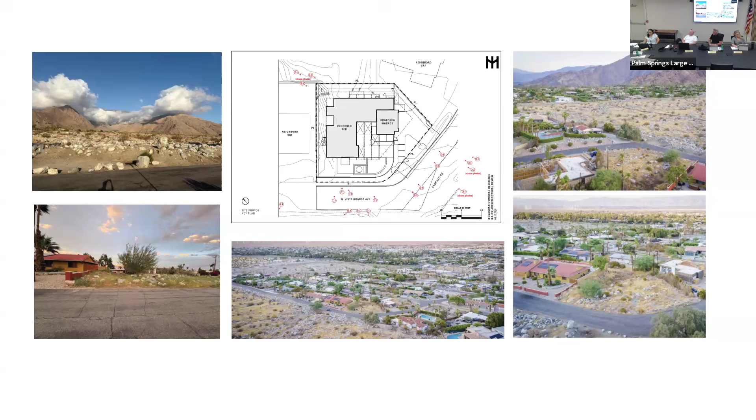The project site is a vacant lot located at the intersection of Vista Grande Avenue and Cabrillo in the Little Tuscany neighborhood. This project site is adjacent to existing developments on all sides except the south, which is the San Jacinto Mountains. Here are some photographs to show the surrounding environment of this project site. The site is adjacent to existing developments on all sides except the south, and the south side is San Jacinto Mountain open area.

The city's zoning code defines hillside property as any area that's 10% or more in slope. This is a slope map that the applicant submitted to the city, which shows that this property is definitely a hillside. The site's topography slopes down from the street towards the northwest corner of the site, and the site includes an area shown here in green and blue, which shows quite a bit of topography. Right now, all the runoff is directed towards this blue area, which further extends to the adjacent property to the north.

Here's a site plan and a proposed aerial view submitted by the applicant. Again, this is a proposed single-family residence, 2,242 square feet for the primary residence and 507 square feet for the garage. Vehicular access is provided off Cabrillo Drive, and the house is designed with an outdoor courtyard area as well as a pool.

And the house includes, in addition to the garage, a bedroom and a master bedroom. In terms of the layout, this is a pretty standard single-family residence. The site design also includes the equipment enclosure in the west side yard, and also the enclosures for equipment and trash bins in the north side yard.

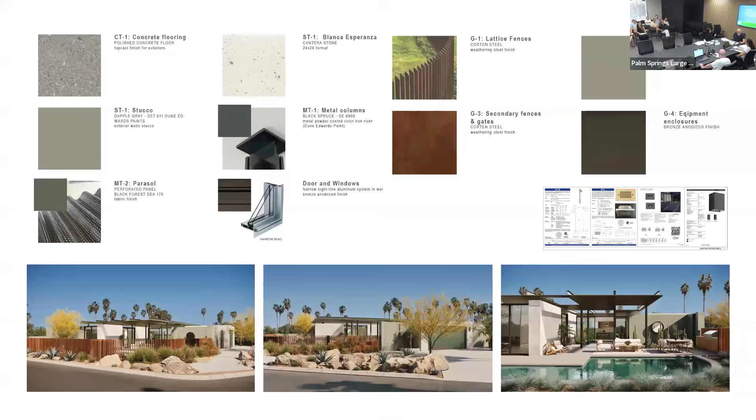Questions of staff? I have one regarding the stipulation about the offset of the driveway from the property line. Is that tied to the material of the driveway, or just the driveway itself? It's just the driveway, so if I can, let me show you here. So it's not the fact that it's an impervious surface, it's that it's a driveway? Right, it's just a driveway.

So the setback I'm talking about is the distance from here to the edge of the driveway right here—that needs to be 6 feet. So the applicant may need to redraw the driveway line to provide the 6-foot setback as required by the engineering department.

Mr. Maneras from engineering has just joined us, and I'd like him to step up here for any questions that we might have.

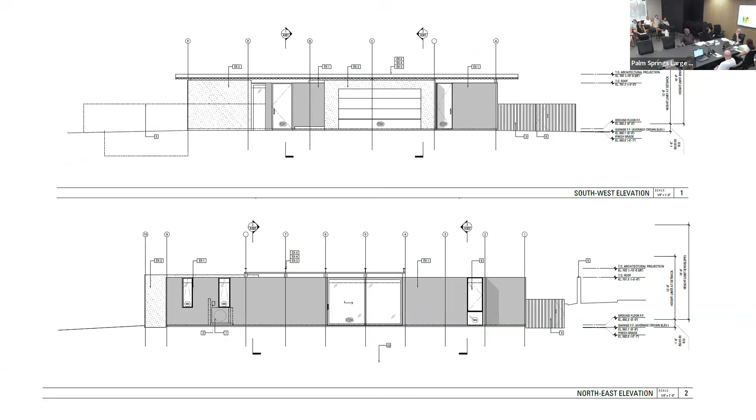Noriko, was there any letters or conversations with the neighbors to the east? The staff did send notification letters to all adjacent properties, including the one on the east side, which is 790 West Cabrillo. And no, nothing was received? No, nothing's been received. Any other questions of staff?

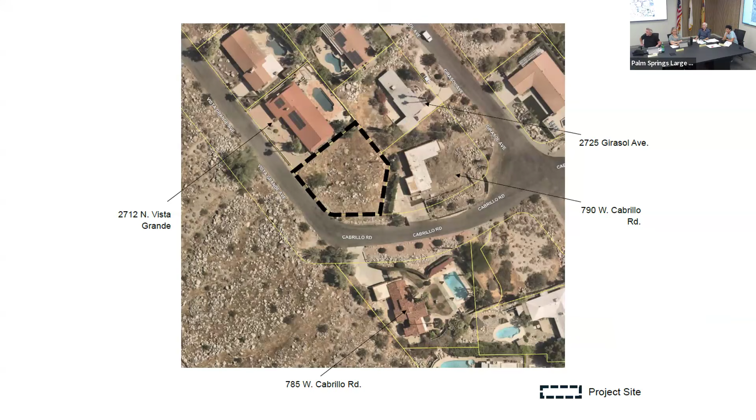Rick, can you, in a simplified fashion, take us through the drainage of the site? Emphasis on the word simplify. I will do my best.

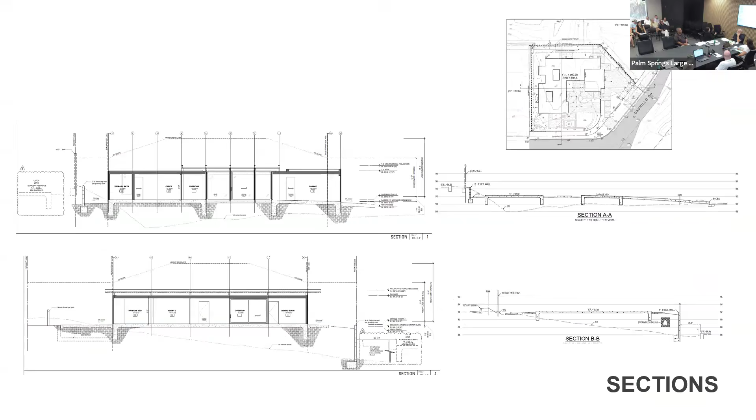The hydrology out here covers the entire intersection, not just here but also down Cabrillo to the next intersection. This part of Vista Grande, as it comes down, has all this water draining from the mountain, coming across kind of uninterrupted. There's a low spot right here in Vista Grande. The water currently hits here, runs through this lot, there's a little wall, hits the wall, goes around the house that's currently there, ends up on the next street over, and then ends up in that intersection.

The county, back in their infinite wisdom 50 years ago, did not do anybody any good by not grading these streets correctly. They did what was called oiling - they brought in a blade, graded off the street, threw down some asphalt and said we got a street. Fast forward 50 years, we're left with all these drainage problems. The house currently being finished on this corner knows that all too well because they end up with a low spot right at their garage, which they had to fix. There's been two different hydrologists look at this to determine the best way to deal with the water. Any way you slice it, the water is going to end up in that intersection going through this house.

So in this case, it made more sense for them to raise this lot up in the back, because the whole lot tilts towards the back. They're actually going to put in a curb and gutter system that will capture the water, bring it around, and push it onto the street where it's supposed to go, ending up in the same exact location. Rather than leaving the lot normal and retaining in the back with an overflow, we're allowing them to tilt it the opposite way. There's great elevation differences all the way around, so it won't make any difference. We were okay with the concept, and they agreed to do the curb and gutter system that would push the water to the next intersection. So it's all going to work out pretty well.

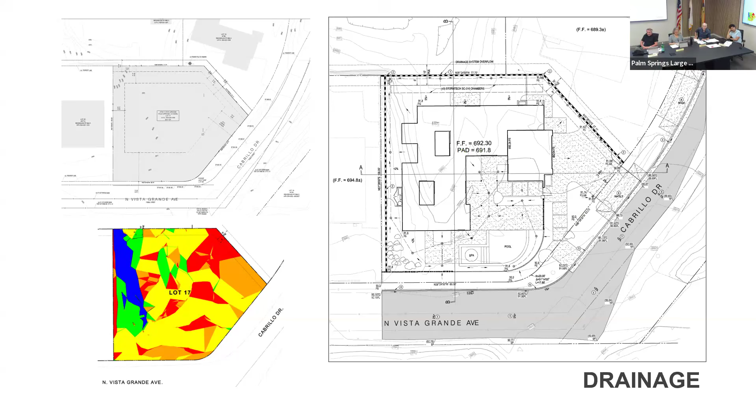Hopefully less. Welcome. Thanks. Hi, nice to see you guys again. In a month? No, two months, I guess. And you have our presentation loaded? Oh, loading, great. Thank you.

So just a couple of extra things to point out that Rick started to touch on, and we'll jump into this a little bit.

Many people have tried to develop this lot in the past. I live on the street just 10 doors down, at 2800 North Vista Grande at the other end of the block. So I've watched this site change hands and go through development many times, and I think you guys have seen a few of those as well.

We'd explored a solution to retain a lot of water on the backside with a massive retention basin. After speaking to Rick multiple times, our team and Rick concluded that redirecting it around the corner was best. It does involve dropping the grade of the street a little to get rid of that divot, but that improvement in the neighborhood is well worth the investment to avoid a large retention basin on the site. It is helping the overall neighborhood.

In addition to dealing with our water, the house on Cabrillo that's just been finished down one block at Girasol and Cabrillo, which reads as a two-story house, has also just finished their grading around their corner, which also deals with water running down the street. So overall, this whole Cabrillo stretch is going to be improved with these two properties' improvements.

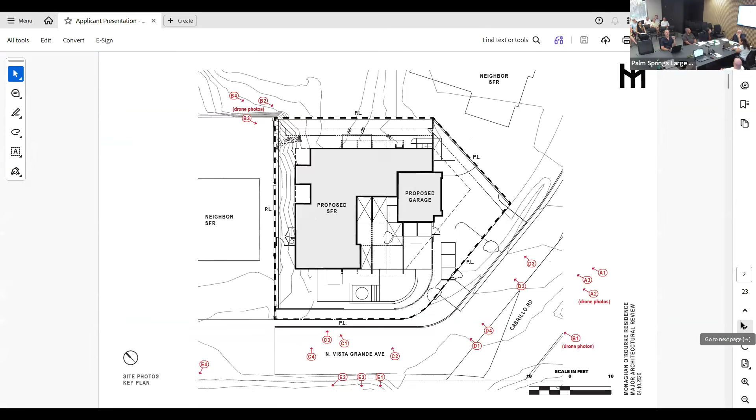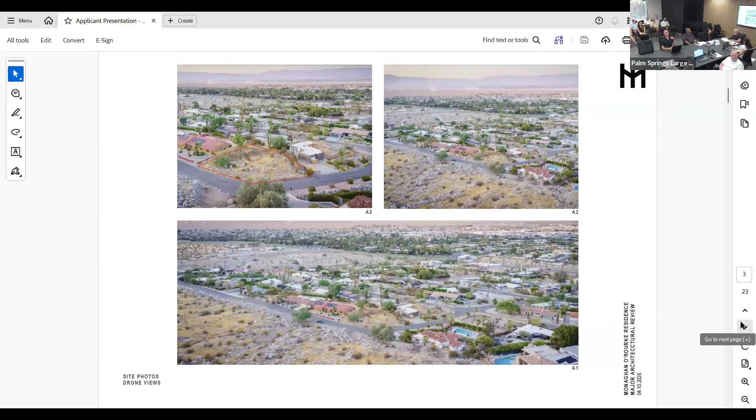Most of the houses in the neighborhood, if you go to the next slide, we'll start to see some of the other houses, typically gable roofs, some with a higher ceiling plane that elevates those gables quite high. We're trying to be as minimal as possible and respectful of the views of those two neighbors to the east and north. They don't really have a lot of view out to our project.

If you go to the next slide, you can see the neighbor to the north here on the top left image is elevated about 2.5 to 3 feet above where our finished floor will be.

They don't look onto our property at all, really. The neighbor to the back is about 35 feet or so, their house being about 35 feet back from our property line. So they'll still have a view of the mountain, considering our fairly low roof elevation. And the neighbor to the east or northeast that's still under renovation, they don't really look at this property at all - it's a garage on that side. So we have no concerns about obstructing any views.

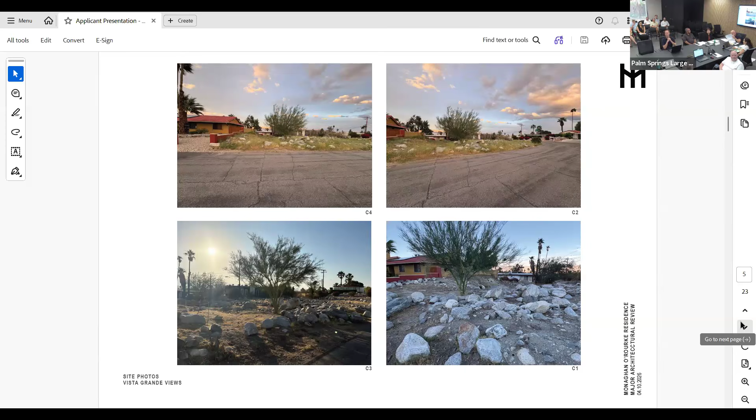We're trying to do as best a job as possible of keeping the views from the distance as open as possible. A couple more slides down.

We'll get into one other thing I wanted to point out - this is the preliminary site plan, just pre-us. This is the existing topography, and you'll see running through the property that low point - hard to see with the gray - but it runs kind of directly north-south on the sheet. And you'll see the finished floor elevations, as I mentioned, with ours being at 6...

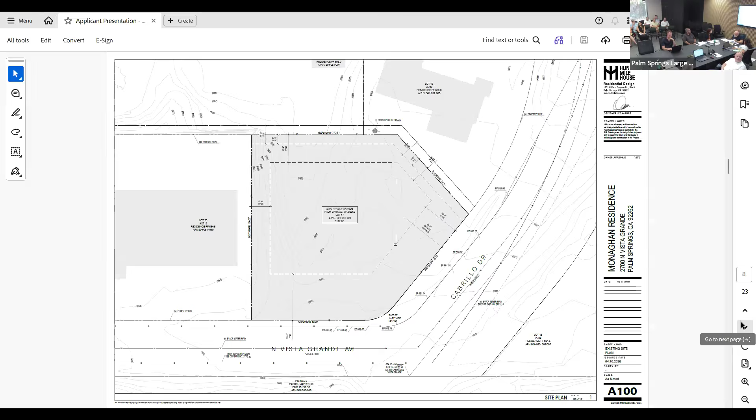If you go to the next file - finished floor at 692 is just a couple feet higher than the existing grade at that point.

One thing I did want to point out - there was an error in the documents you guys received. If you go to the next slide, this is the site section with our house in place. The existing grade noted on your documents is actually inaccurate - we adjusted it a little bit. The civil engineer sent a different scale for his horizontal and vertical, and it wasn't interpreted properly. So we've adjusted the existing grade here, shown as the dashed line in both of these elevations, to show how minimal the fill actually is on this site.

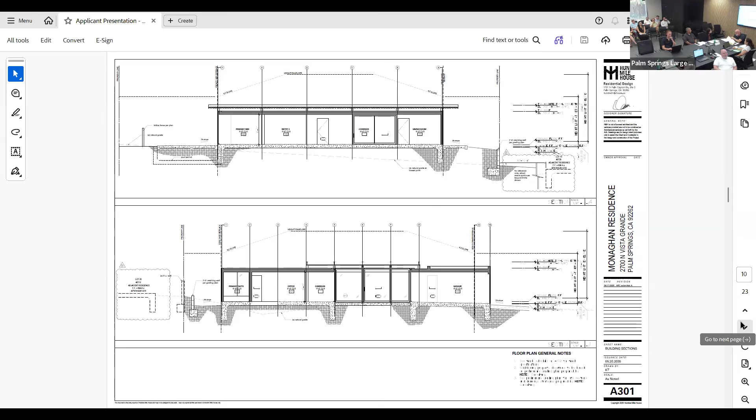If we jump ahead a few slides to the first rendering - I wanted to touch a little more than Noriko did on the palette overall.

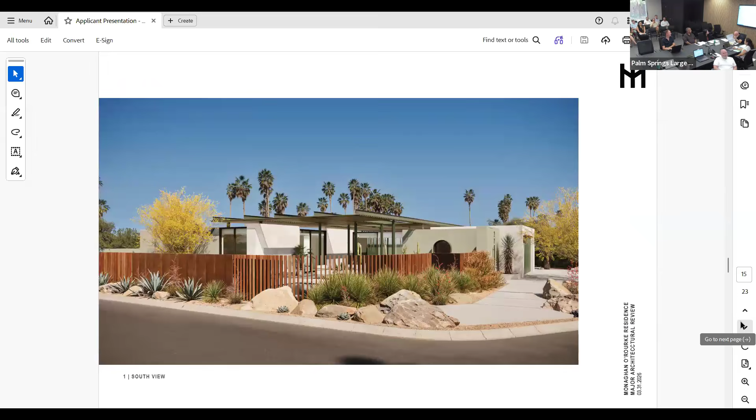As was noted, we're really trying to embrace a desert kind of warm, neutral palette. There's a hint of green in everything - the stucco we're using is gray but has a hint of green. We're trying to stay within this natural desert vegetation palette of muted sages and within that family. We're using a natural stone imported from Mexico, a beautiful white Cantera stone to absorb heat. These become large thermal masses on the south and west sides of the home to absorb heat and release it at night.

As was mentioned, we have this green parasol that comes out, and it's doing a lot of things. A portion of that parasol covers the roof plane itself, which helps reduce heat load on the roof. The parasol is also what's going to be holding our solar panels. And it shades certain areas strategically, so this outdoor covered living space at the front of the home provides more comfortable outdoor living space for the owners.

It's a very challenging site - a very visible public site, and we didn't want to close it off with hedges. We wanted to keep it as open as possible for the views. To do that, we also didn't want living room windows right up facing the street. So we've pushed the public living spaces back to the northeast side, and opened it up to this interior, open courtyard. They'll feel a little more removed when they have their windows open in the evenings as people walk by, but they'll still have this view of the mountains.

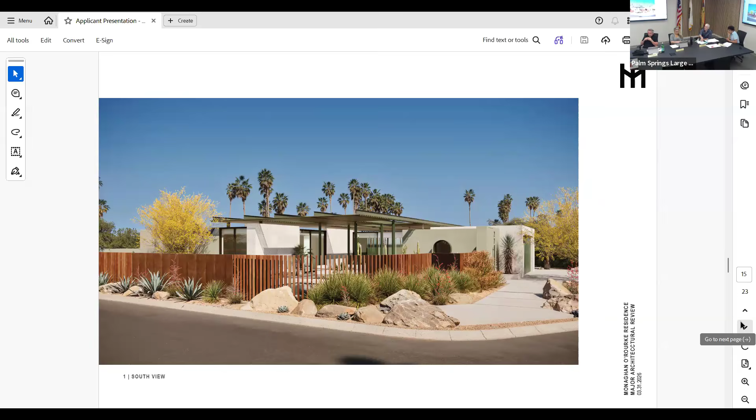I think that covers everything I wanted to talk about. Thank you so much. It's a really good set of drawings, and your presentation and Noriko's presentation helped us understand it. Any questions of the applicant?

Your parasol, is it metal decking? It is a perforated corrugated metal, and it looks suspended below steel beams. Are your columns steel? Steel, yeah, they're a custom kind of cruciform shape but steel. And you're framed in wood? Yes, currently.

If I can touch on the metal, one of the requests of our client from day one was to be future-proof and as fireproof as possible. So all of the exterior materials are stucco or stone and metal. Everything that's exposed is Class A rated.

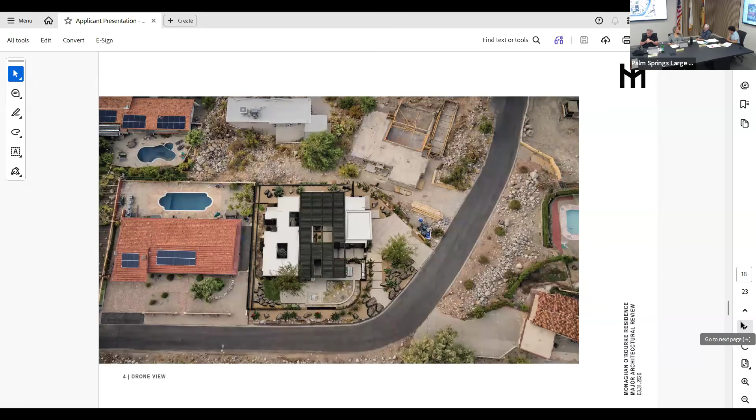It has a wonderful scale to it. And it's interesting, you've limited the overall height of the building to just a bit over 10 feet, and yet it delivers a sort of lightness and gracefulness that is very successful. Any other questions of the applicant?

I do. If I remember correctly, there was a neighbor who was not so happy about the views looking into the house, and did we move the trash bins or something? Are you recalling a different project? Because this is our first time. Oh, sorry, different project. Same guy, different project. I get our projects confused all the time too.

Good to know, I don't feel bad. Visually, it's stunning. I love the use of the sage, the green, the indoor-outdoor feel, while also keeping the living areas private. I love the open sort of fencing, it looks really cool.

Question - am I seeing this correctly, that the windows are going up to the very tippy top of the building structure? Yes, we wanted to try and minimize the number of exterior walls and elements and reduce the headers. So the glass goes right up to the parapet, and there's a header and drywall behind that, a little bit of drywall vision light. It's really to extend those windows up and take advantage of, even though we have a low ceiling, an 8-foot ceiling, it's a fairly compact vertical. We wanted to try and elevate that by having the glass extend up as high as possible.

Mission accomplished there.

Tell us a little bit about, you live down the street, and you're in the brunt of that wind every season when it blows. Tell us a little bit about this pool location - do you have any concerns that it's exposed out there on the corner? Not really, it's windy no matter how you cut it. My pool is on the north side, and we get some tree debris in the pool, but it's not bad. There's nowhere else really to put the pool on a site of this size, and as it is, it's pretty compact - it's a plunge pool, not a big lap pool.

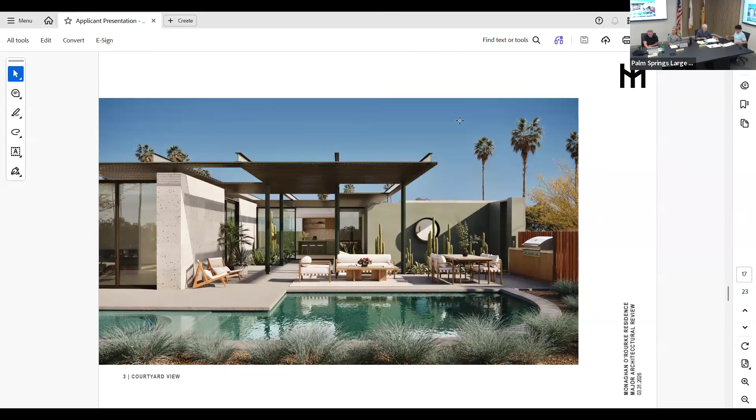Moving on to item 3B, a request by In-N-Out Burger for a major architectural review to construct a new 3,886 square foot restaurant and auxiliary drive-through facility at a 2.35 acre site located at 1801 East Palm Canyon Drive, Zone CSC, Section 25, case number AR 2025-0040. Rico, it looks like this is your project as well. Could we have a report, please?

The second project of the night is an In-N-Out Burger project. The applicant is proposing to construct a new restaurant, which is 3,886 square feet in size at a maximum building height of 25.8 feet, single story.

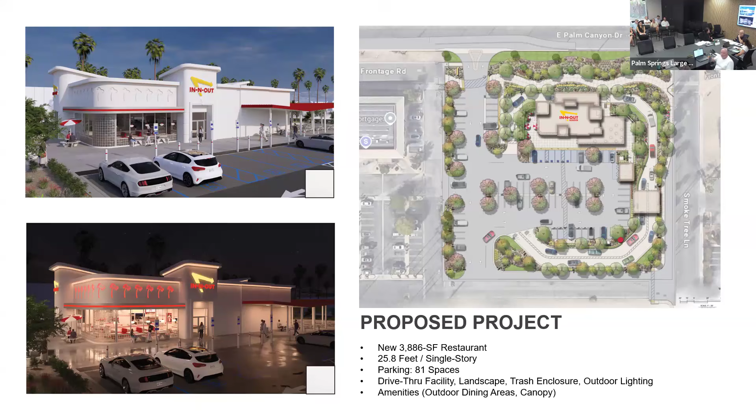The proposed site design also includes an 81 space parking lot, a drive-through facility, new landscape, trash enclosure, outdoor lighting, in addition to amenities which include outdoor dining areas and canopy.

The project site is a former Bank of America building site, and the building has been demolished, but the proposed project happens where the building previously existed, in the front portion of the lot which faces East Palm Canyon Drive. The site is actually adjacent to a frontage road, which is a public road, which is going to be vacated as a part of this project.

There are also two private roads on the site, south and east sides. And this is a proposed site plan.

The building will be located near the northeast corner of the site, and right next to the building there will be two outdoor dining areas, one on the west side and the other on the east side under a canopy. The site design also includes a trash enclosure and an associated canopy.

The proposed drive-through facility is designed to accommodate 42 vehicles in queuing. As staff mentioned, the frontage road will be vacated as part of this project, which is going to become the public sidewalk. In addition, there will be a perimeter landscape that goes around the drive-through as well as the parking lot.

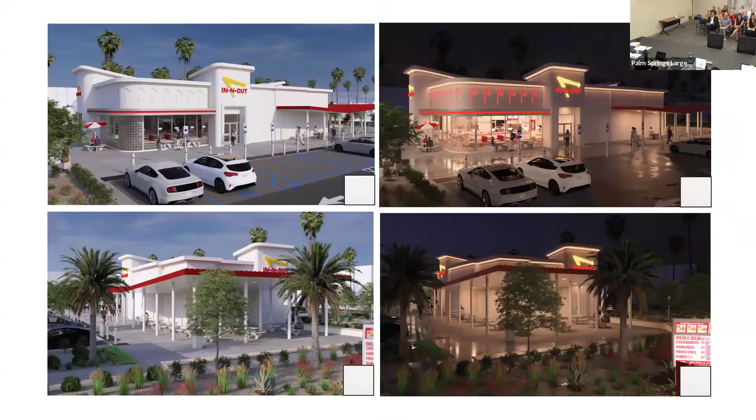The proposed building design includes 4 tower elements on each elevation. The restaurant is designed so that the customer dining area is located on the west side of the building.

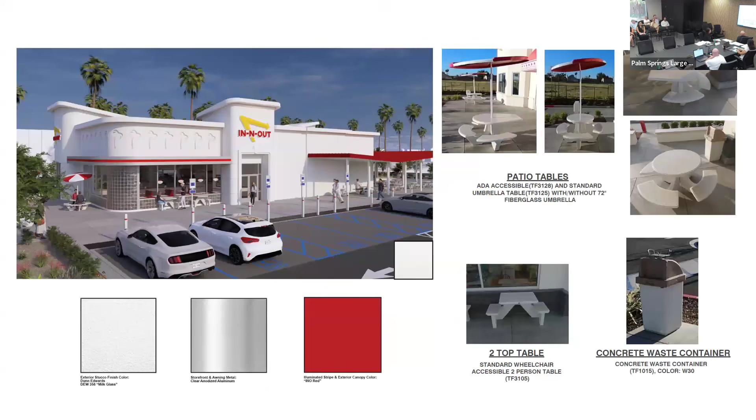These are the building elevations. The applicant proposes to place mechanical equipment on the roof behind the parapet, and the equipment will not be visible from public view. Here is the proposed color palette.

There's an actual material board in front of you, so if you can pass it along. The project proposes In-N-Out's corporate colors, white and red, and that color theme is applied to amenities such as patio tables.

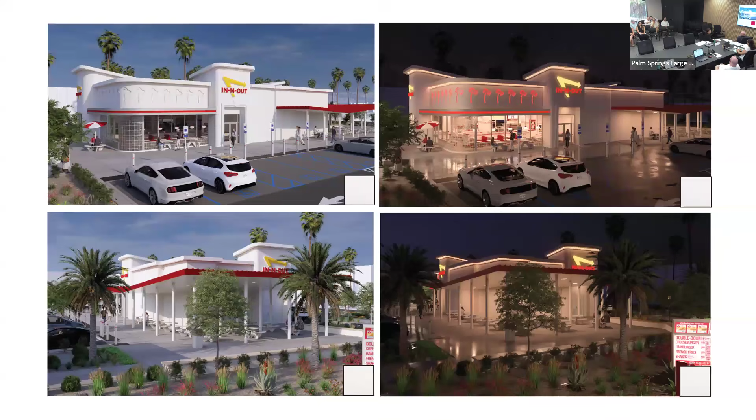These are the renderings during daytime and nighttime. As staff mentioned, the proposed design includes architectural indentations that will be illuminated at night. The parapet cap and the roof are designed with underlight, which will outline the building at night. And here's a different view of the building.

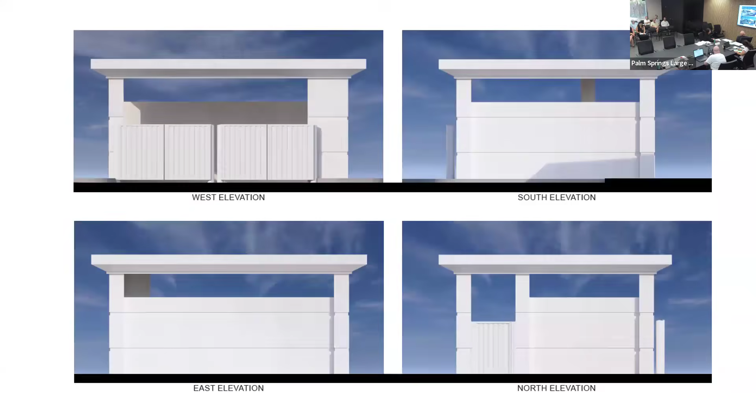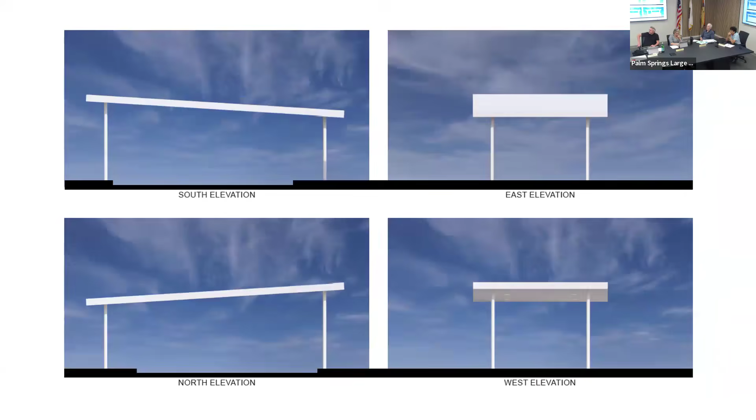Additional renderings taken from different angles, including the drive-through. This is a proposed trash enclosure design, which resembles the architectural design of the associated canopy.

In response to the Planning Commission's comments about parking lot landscaping, the applicant proposes the addition of 2 diamond islands in the middle parking lot, in addition to 1 shade tree by the west dining area.

As part of the major development permit application review, the Planning Commission noted several design concerns. The applicant maintains that the current submission has fully addressed the comments provided by the Planning Commission and the joint subcommittee, while balancing In-N-Out's need to maintain a corporate identity.

Staff thinks the proposed design incorporates different elements of different architectural styles, and the recommended conditions of approval would allow the proposed architectural styles to better integrate and deliver a contextually appropriate design.

The recommended conditions of approval include the items shown on the slides. The first is the treatment of building corners: square off the building corners, parapet corners, and parapet roof corners; remove the keystone above the entrance door; reduce the fascia height of the awning located at the southwest corner of the building; and remove the horizontal reveals proposed on all building elevations.

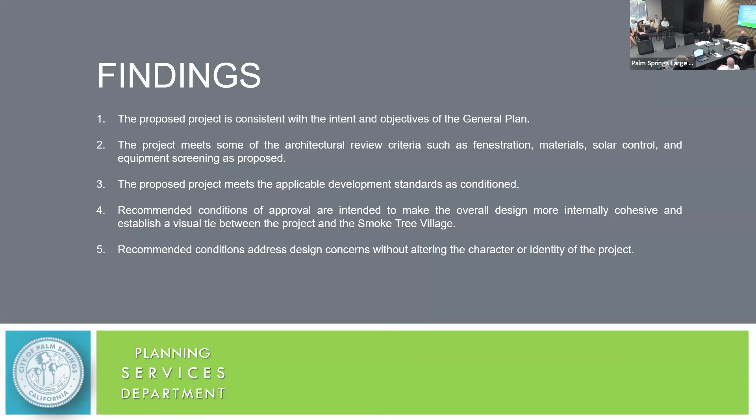In conclusion, staff recommends that the architectural review accept that the proposed project is categorically exempt from CEQA review under the Class 32 categorical exemption, and approve the application subject to the conditions of approval recommended by staff.

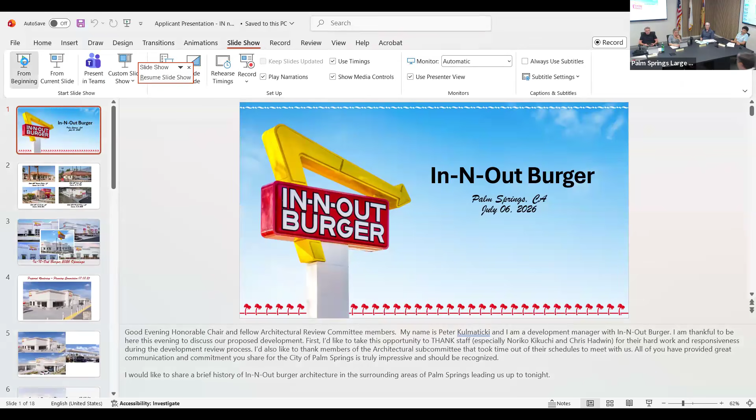Okay, thank you. All right, I think what we want to do tonight is have the applicant make a presentation, then allow the audience and members of the public who wish to speak on this matter to speak. Then we'll allow the applicant to address any concerns brought up by the public, and then we'll go into discussion. So we'd like to invite the applicant up and the applicant's team.

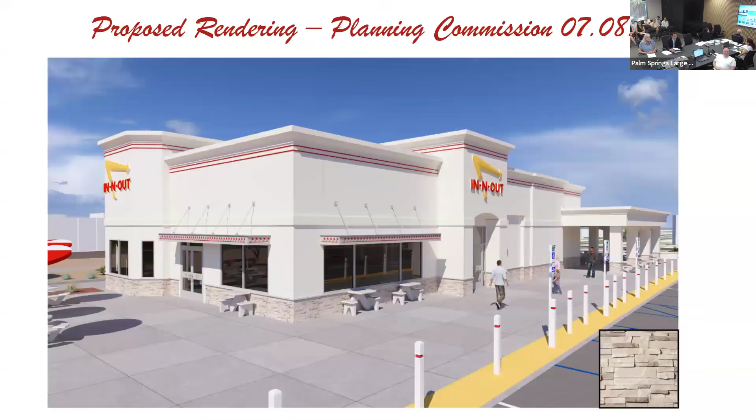Sorry, this clicker is not working so great. Consistent with our design language, this building is what was presented to the Planning Commission back in July of 2025, just about a year ago. Some additional views to the rear, and the associated canopy in the drive-through area.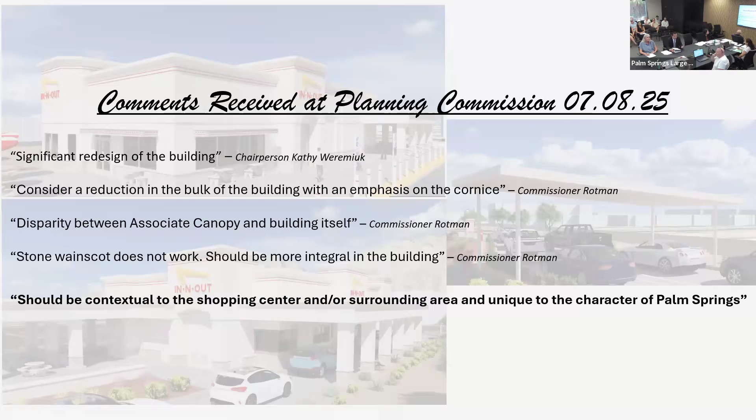With any board, commission, or hearing body, it is quite common to get a variety of opinions. However, this is super helpful, it is what breathes life into projects and helps foster alignment between city and private development. However, there is one prominent theme that has remained consistent throughout this process: this building has to be unique to the character of Palm Springs. Speaking of character, Palm Springs has a lot of it. As you walk, bike, or drive through various neighborhoods, you are surrounded by a sense of community with a deep variety of architectural styles. All of this leads us to where we are today.

I swear I'm clicking this.

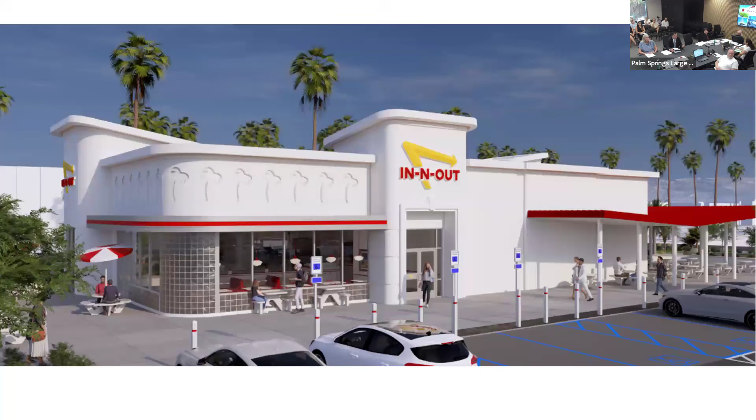An In-N-Out building unlike any other and unique to Palm Springs. You will not find this building in the In-N-Out portfolio.

Noriko showed you some slides of the renderings previously, so I'll just shuffle through these quickly. One thing I did want to emphasize on this particular view is we heard a lot of feedback about providing shade on the western end. We are proposing field-grown olives here. We're open to changes staff recommended on the species of trees, but we definitely want, at time of planting and opening, to have trees in this area shield the entire western patio and provide shade for customers.

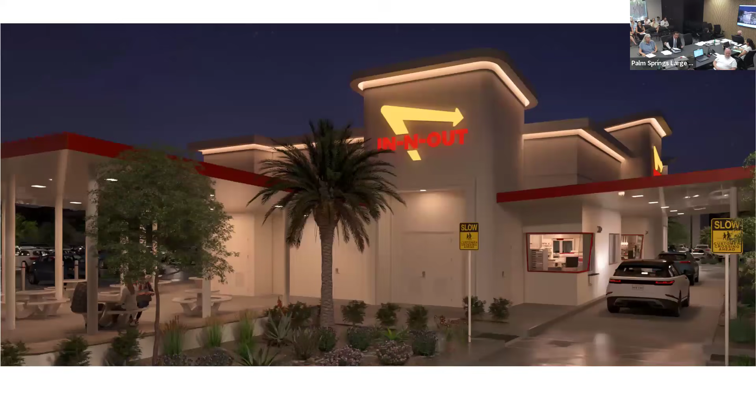We listened and took time to be receptive to the various feedback we received. This is a design that blends In-N-Out's design language with the unique character and style of Palm Springs. Again, we remain committed and excited to be part of the Palm Springs community.

That was concise. There's soccer on. I didn't say that.

Chair and esteemed members, my name is Tracy Conrad. I am the Chief Operating Officer for Smoke Tree Ranch, and we are the underlying landowner for this project. We've spent two years really thinking long and hard about how to reposition the shopping center.

This is a separate parcel. It is not part of Smoke Tree Village, and it's not subject to the master lease that Smoke Tree Village is. I would contend there are some nuances about the frontage road, that it is on Smoke Tree property, subject to an easement. It's a more technical discussion.

But I understand we have spent a lot of time to mitigate things you will probably hear from the public, that we've been reading in comments on social media. I want you to know how thoughtfully and deeply the board considered what to do. What do you do with a shopping center that's now 60 years old? And tempting as it is to re-adjudicate the decision made in the 1960s to make this a shopping center, it's impossible to do now.

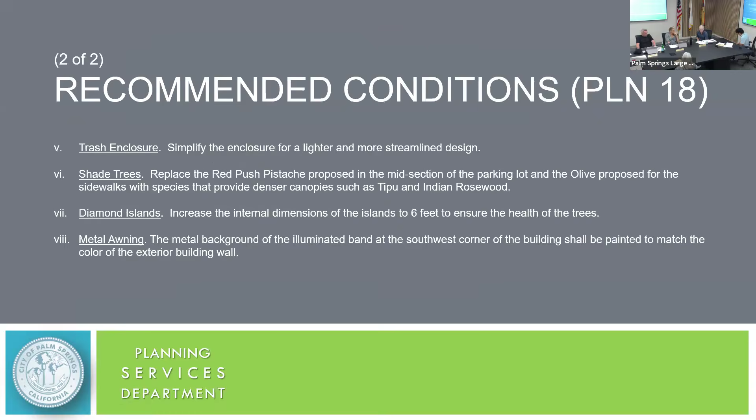Okay, so what I'd like to do now is just open it up for committee comments. And Noriko, if you can pull up, start with the site plan. And maybe since Vice Chair Walsh and myself, we've had the advantage of seeing this a couple of additional times. Vice Chair Walsh, why don't you start with where you think additional measures or clarifications or additional design modifications could be made here that would make it a more fitting building for both the site and the city.

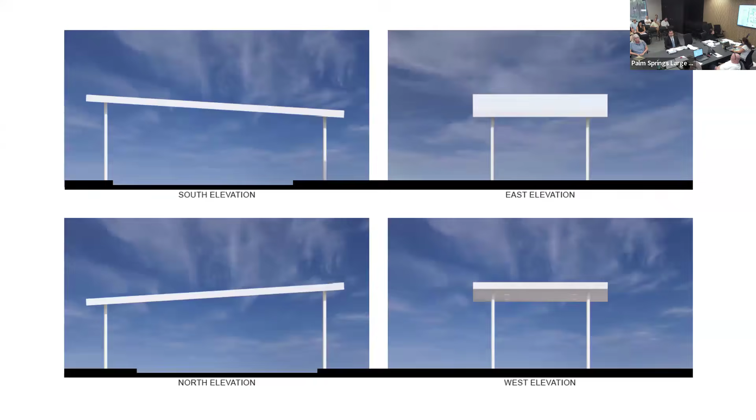And we're going to look at the elevations. Yeah, we can start wherever you want. I think I first want to comment on the fact that, I mean, this has been around for a while. This started in 2024. I looked at my dates on this, and we have had 2 of our subcommittee meetings.

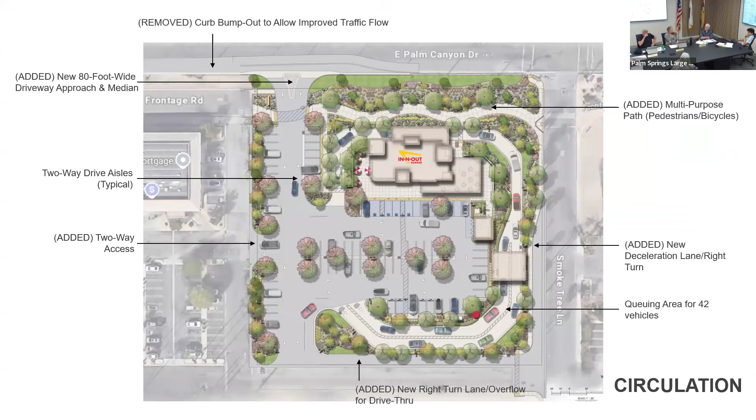Not ready for prime time. It is, by all stretch of imagination, it's not ready for prime time at this point. I do think, though, that what we're looking at is something that is fixable.

One comment that was made is that we would be the gatekeepers of architectural correctness. That's not quite how it was put, but what I've learned sitting on this commission is that we are limited to a prescriptive process. We can issue conditions and recommendations, but we can't grab the pencil. It is breathtakingly frustrating not to be able to do that. As Tracy Conrad put it, you would design it differently, and you would design it differently too - no kidding. So it takes a deep breath and a broad view to be comfortable opining when you're limited to your tools and how direct and impactful you can be. Along with that comes acceptance of some stuff that isn't perfect, but you have to work with it.

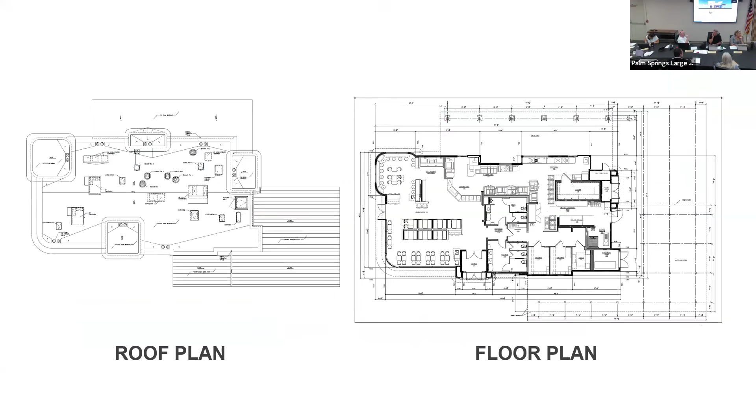Because I feel when we're looking at this, it's so flat that I'm trying to understand all of the towers. I see 4 of them, one on each facade of the building. And I'm trying to figure out why there are so many. I think they're hiding their mechanical equipment, among other things. Well, if you go back to understand that, but they're aggressive, I think.

It's just the larger trend with fast food. If you looked at the 1970s version of In-N-Out with a gable or hip roof, the signage was on the fascia, or the signage was freestanding somewhere. At some point, all of the fast food restaurants went to the idea of hiding more mechanical equipment and building towers for signage.

And it's what we have. So telling them to get rid of the towers is like telling them to take away their identity. No, that's not what I was saying. What I was saying was maybe we don't treat them all the same. Could there be one that is taller, the other ones shorter? Well, what we talked about—that's just a question.

In the subcommittee meeting, we looked at this as a kit of parts, and each one of these towers has a different element to it. So that one we're looking at here has the front door or the main entry. So it makes sense to pop that thing up, to recess that entry in, it's facing south. However, if you go around to the dining side where folks are on the outdoor patio—

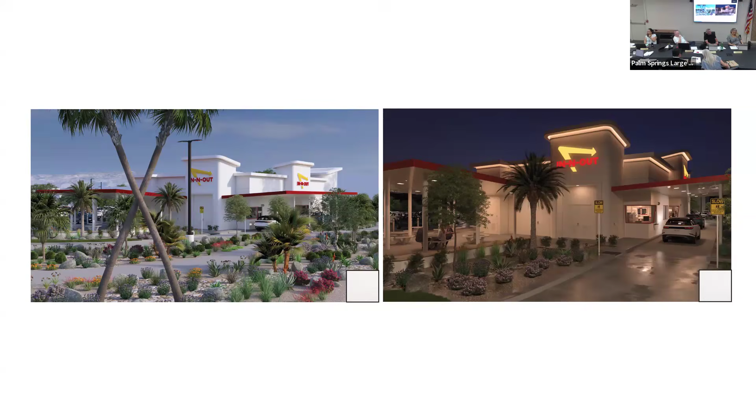I mean, I think if you do that, you have another language. Somehow that ought to find its way into the rest of the site. It should occur in more than one place. In the same way that you're suggesting that, maybe that's the solution to the glass block, is to use something like a screen block that is then backed with a solid surface, so you're not dealing with all this stuff. It brings that same notion of breeze block into some other part of the building. Yes, I think glass block is part of what makes it look so Art Deco. It doesn't fit in Palm Springs. Yeah, you throw in the repeated little palm trees that could be flamingos in.

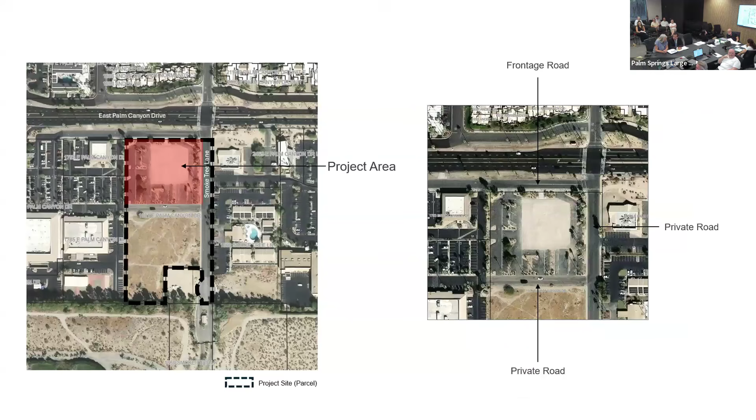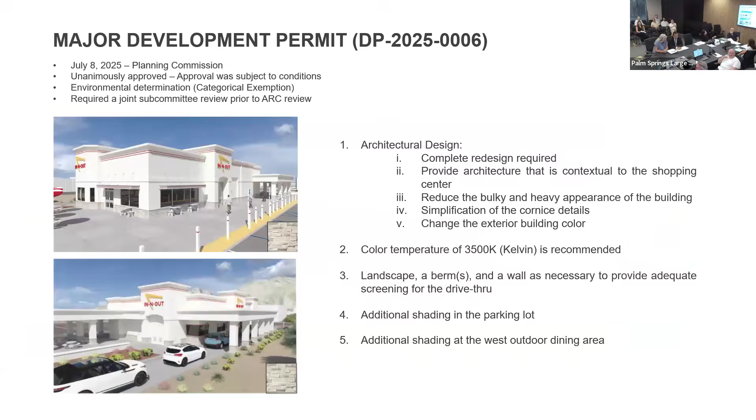Could we look at a site plan so we can just kind of get an idea of length and location? Yeah, maybe the site plan isn't the best. That previous view, yeah, the elevation. Keep going, that kind, yeah. There, that one, yeah, that one right there.

Does anybody know what the height of those service windows are? Are those 8 feet, 6 feet, 7 feet? Kind of want a band going across there that just takes those out. It looks like 6 to 8. So the top plate at the tower is 10 feet. The drive-up window head looks like it's maybe about 8, 7.5 or 8.

Well, it would seem like screen block, breeze block, from that column to that column. Right, at maybe a foot below those windows. It also provides a unifying element. Yeah, so say 7 feet. Do you know what we're getting at?

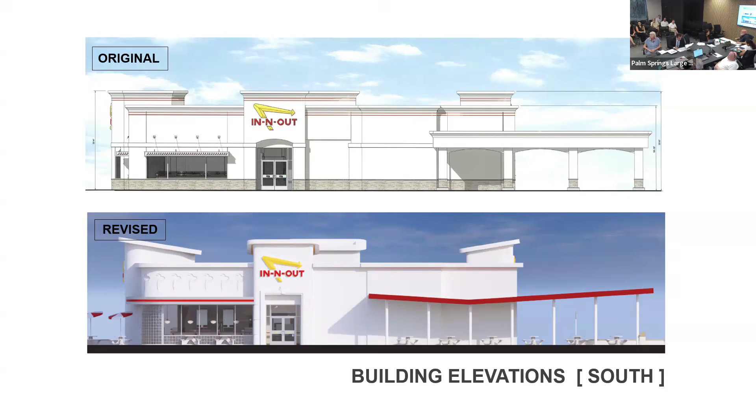Although there is a planter, which the rendering shows as this one. So we really try to keep it away from here - it's in this location that we brought a finger out to create more shade.

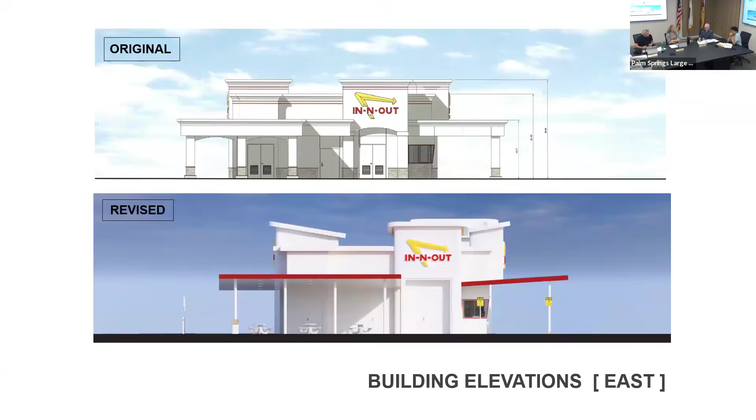You make a good point about the ineffectualness of the landscape, but I think to simply extend it - we're all sitting here thinking how hot that's going to be, and you just want a quick run out the door and sit at the table. It just seems like something that should be revisited. It is important - it feels like one bay, one additional bay there. That illustration right there helps exemplify how scorchingly hot, dry, and uncomfortable that whole entry sequence is. Right. It's kind of on the A list, I think.

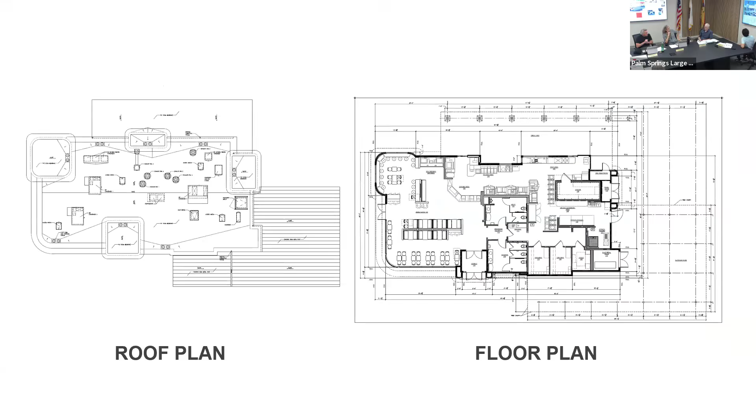So bring that back to the team, ask them to bring that canopy over one more bay. Can we go to that elevation? Because I just kind of scaled it with my hand - it doesn't hit the tower. So that extended one more bay gets me in here with that. So there's still some white space between the sign, the tower popping out a little bit, and this thing providing that additional shade.

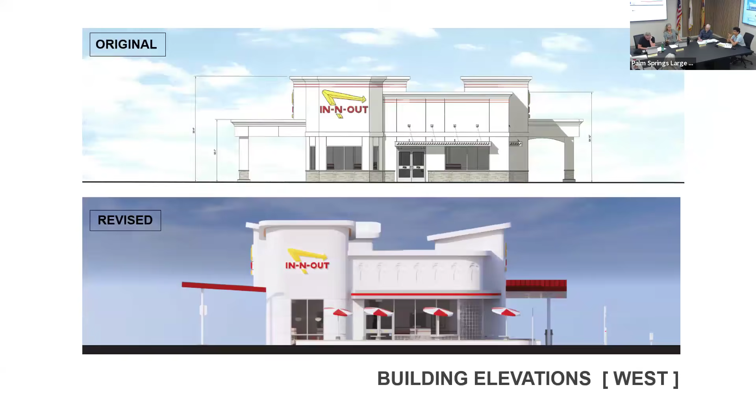Can we go to the shed canopy for, I think it's the team members out in the drive aisle element. I think there's a specific name for it. Associate canopy, associate canopy.

So that feels really weak. One way we handle this is to just double up the columns. For every single column at the corner, if you pair two columns together, it starts looking less utilitarian, less like it's gonna fall over or walk away, and starts feeling more like there's intention behind it. So I'd suggest pairing up those columns, whether north-south or east-west, so there feels like there's something more robust going on at those corners.

If these are 5-inch diameter columns, you could go to two 4-inch columns. They don't need to get big and chunky and heavy, they just need to be doubled up so it feels like there's something there. And if you could incorporate that breeze block into one end of this, the end out on the drive aisle, that would help take this Palm Springs kit of parts and move it around the building so it's on at least two sides. Pretty simple measure to give some additional shade, particularly on the east side early in the morning when the sun's coming in.

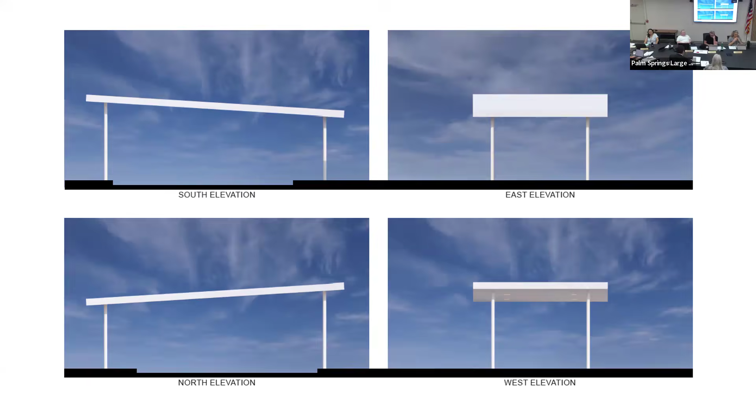The trash enclosure, could we look at that? That's being modified to be the columns, the round columns, or are we stuck with this as the proposed solution? Because it's following the old design. Is it a question to me? Yeah, it's a question. That's our current design, which has not taken into account the condition as written.

Okay, so I think this needs to speak the same language as the canopy that the patrons are sitting and dining outdoors under, that the associates are positioned under, and then this thing somehow pairs columns at the corner. The solid elements around it are probably good, but if there could be breeze block incorporated so you're not seeing into the inner workings of this. I understand you guys take pride in this, and I'm sure it's clean and power washed and all the other things, but just the heaviness of this, it should be lightweight and doing all the things you need to do, but in the same design language as the rest of the center.

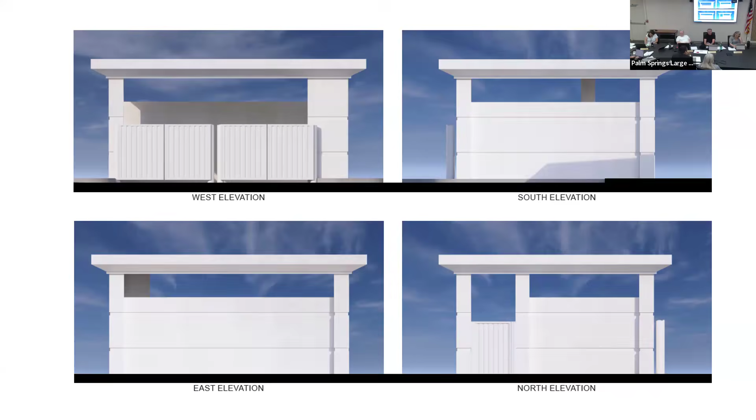And then you mentioned about extending the canopy, the east dining area towards the entrance door, or Bay West. I would take it over the door. The whole purpose would be to give you desperately needed shade when you walk out into the blazing sun on that south elevation, period. So they extend it to the door? Correct, somehow it can work architecturally. Extend it over the door, so the door is actually giving you shelter as you're approaching it. Right.

I think architecturally that's kind of a non-starter. It interrupts that tower and makes the sign disappear. That's going to be a difficult ask, one more bay. I think they have runway there. Over the door is going to be tough. I totally get what you guys are saying, but you get out of the door and make a quick right.

All right, let's ask for what we think is the most appropriate, and this is a list of what we would like to see. What if you get none of it? I'm not done yet, sorry. Keep going. Oh, I'm not done yet, yeah.

No, I know, couple other items you mentioned. Go ahead. You mentioned about the associate canopy, double up the columns at the corner, yes, and then the trash enclosure design, add screen block on the east side. Correct, and incorporate breeze block there. Okay.